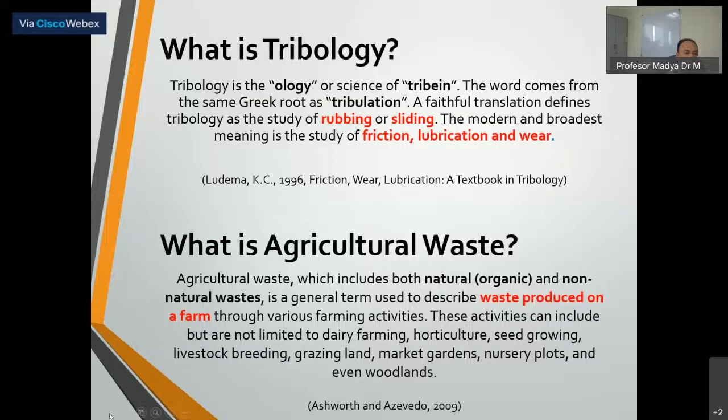Okay, this is a popular diagram, the breakdown of passenger car energy consumption in the world. This diagram was published by Holmberg in 2012. He found that in a passenger car, if we fuel the car with 100%, about 30% of the energy is used for friction losses. These friction losses need to be minimized as much as possible through technology developments, either using new materials, new coatings, or new lubricants - now we call them nano lubricants.

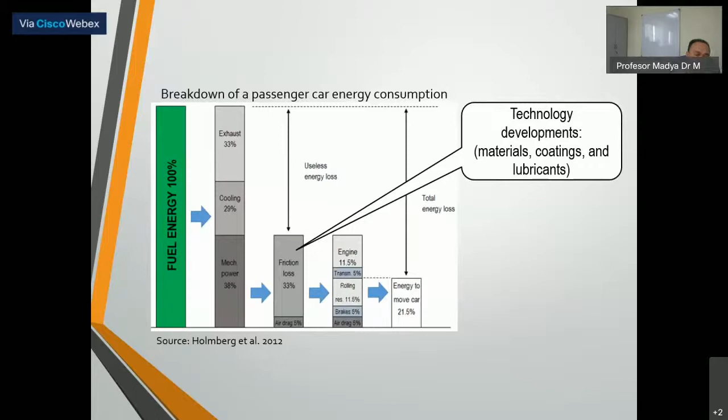Okay, and then this is a chart from the STLE, a list of technologies that will play a significant role in the transportation industry through long and short-term trends. It was published in 2017.

So from this, we can see the higher demand for the next 5 to 10 years. We can see that high efficiency vehicles are in higher demand, low emission vehicles are in higher demand, and lighter materials used in vehicle construction are also in higher demand for the next 10 years, along with longer lifespan for automobile parts. This relates to wear and also maintenance. So with this, we need to develop sustainable bio-tribo materials.

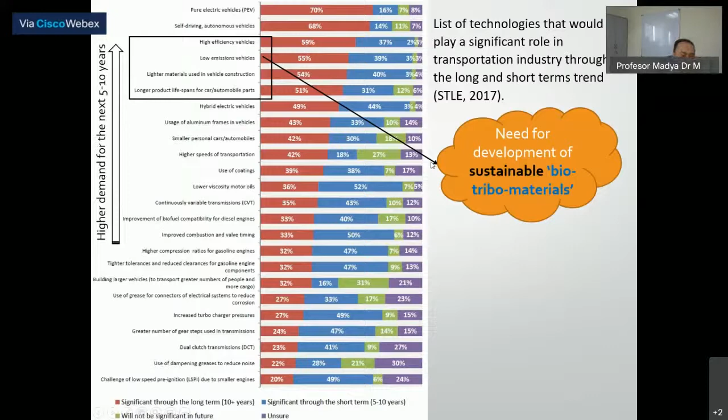Okay, actually, there are two commodity plants in Malaysia: oil palm and kenaf. The oil palm is managed by the Malaysian Palm Oil Board, founded in 2000, and kenaf is also founded in 2000, by the National Kenaf and Tobacco Board.

Okay, now we go to the palm oil industry in Malaysia. Palm oil is the largest source of residue, about 70% of the total in Malaysia. The Malaysian palm oil industry itself is committed to minimizing the release of harmful waste to the environment, and today the zero waste concept has become part and parcel of industrial practice.

Okay, this is the oil palm tree. Malaysia is the biggest producer, with 11% of world production and 27% of the export trade. This oil palm tree actually creates a major disposal problem. There is an abundance of raw material available from the palm tree, consisting of around 90% biomass waste and only 10% oil. The oil palm tree only produces 10% oil, and the rest, about 90%, is actually biomass or waste.

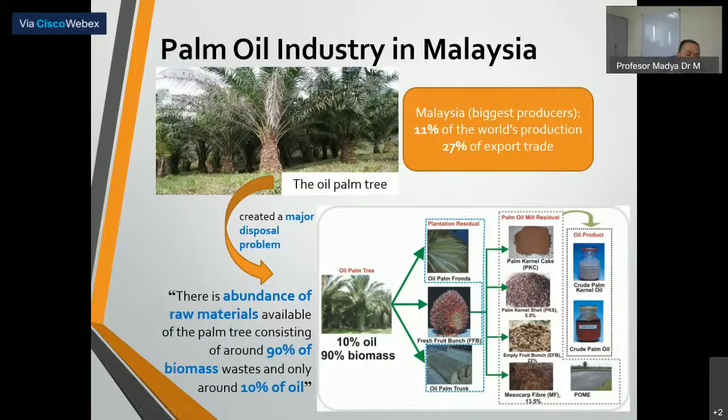Okay, this is the oil product and waste biomass obtained from palm fruits and seeds. That is about 52 million tons of oil palm. We produce palm oil, and then we produce palm kernel oil, about 20 million tons, but the rest, about 35 million tons, is actually waste, either in the form of empty fruit bunch, fruit fiber, or palm kernel cake.

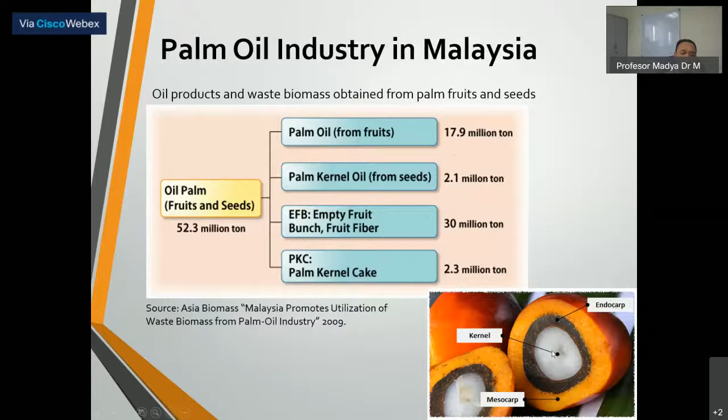This is the oil palm fruit - this is the endocarp, this is the kernel, and the mesocarp. This is the term. Okay, now we go to the kenaf industry in Malaysia.

Actually, this is the Kenaf tree. The developing of the Kenaf industry is reflected by two important events: the transformation of MNTB, Malaysia National Tobacco Board, to the Malaysian National Kenaf and Tobacco Board, and the inclusion of the Kenaf industry as one of the strategic industries under the East Coast Economic Region Development Program.

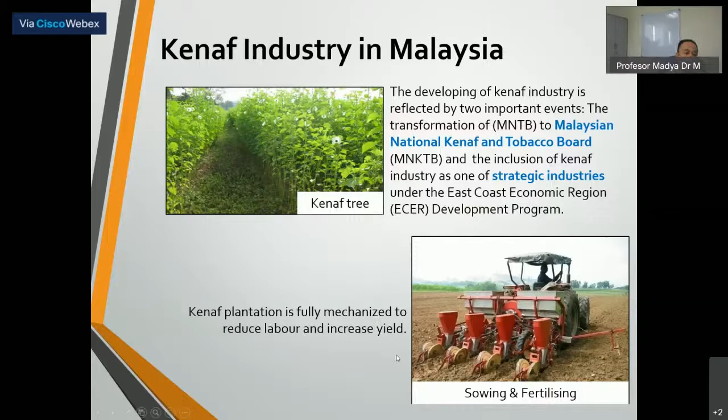This is now the Kenaf sowing and fertilizing using fully mechanized methods to reduce labor and also increase the yield.

Okay, the Malaysian government has taken the initiative to focus on the development of Kenaf products by integrating the upstream and downstream processing R&D towards economic and marketing activities.

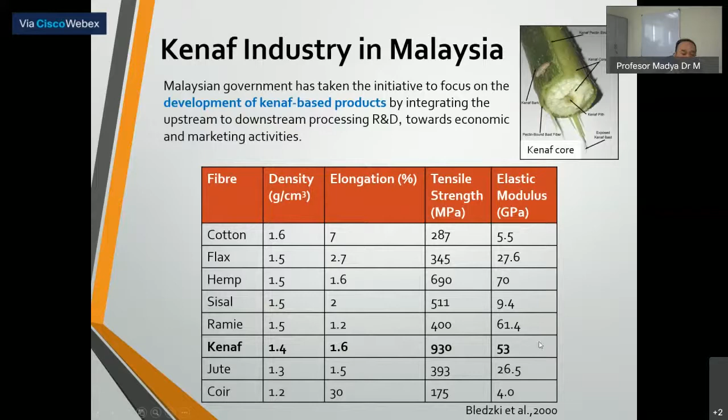This is the morphology, the term of the Kenaf core, and then this is the summary of the mechanical properties of the available fiber. We can see that Kenaf has a lower density compared to others, medium elongation, very high tensile strength above 930 megapascals, and also a very high elastic modulus of about 50 gigapascals.

Okay, now this is the future application of palm oil and Kenaf in tribology.

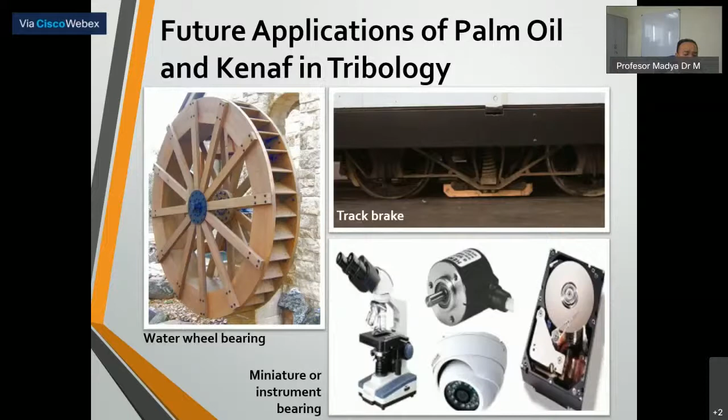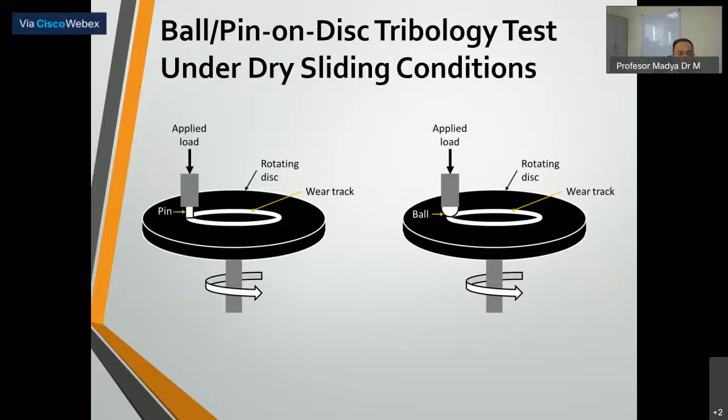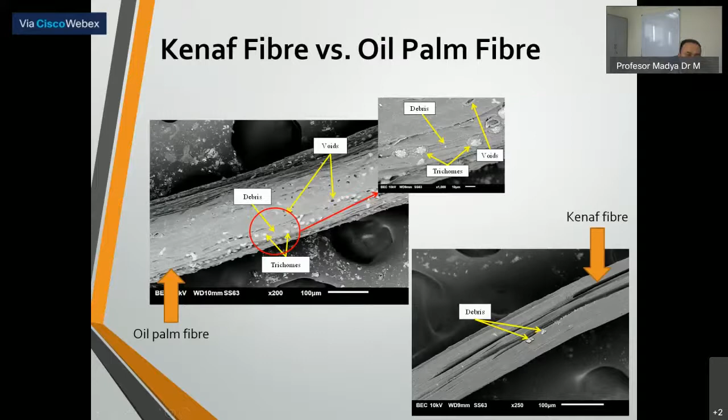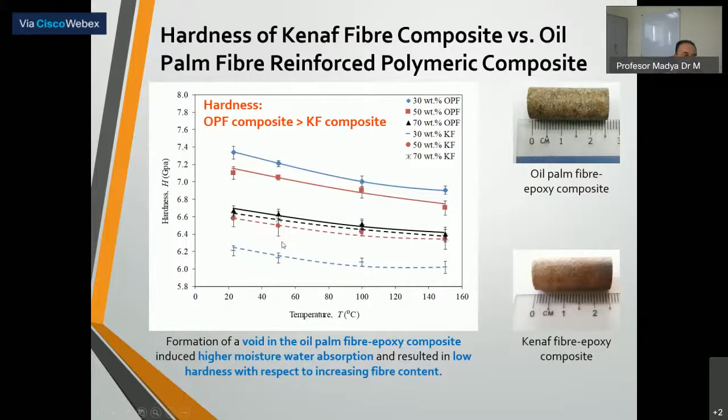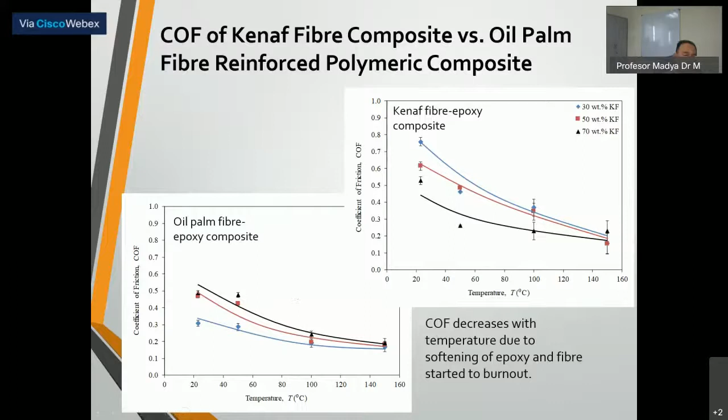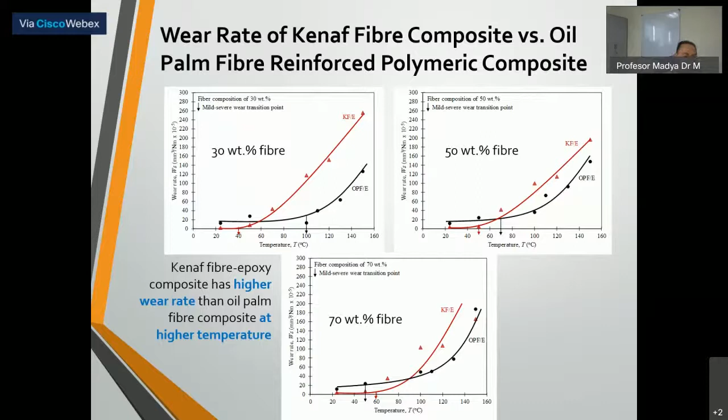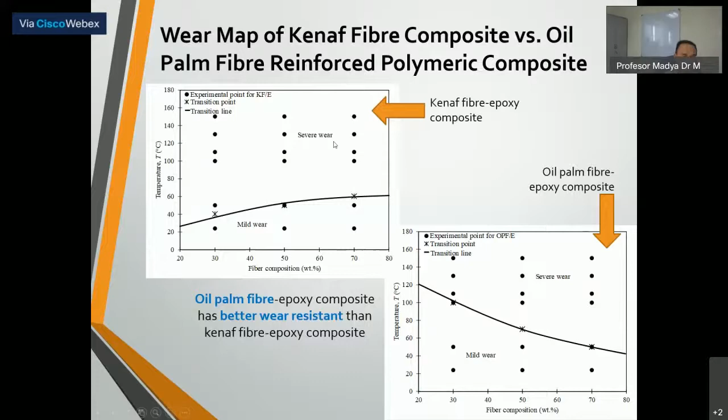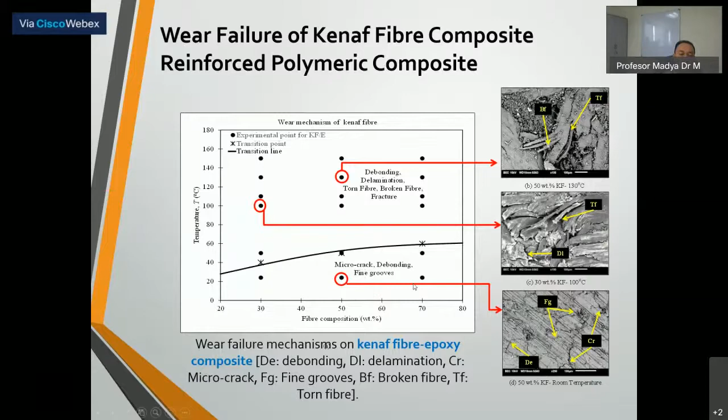In the mild wear region, we can see only micro crack and also fine groove, because of the gouging. This is the oil palm fiber reinforced composite wear failure. Basically, the wear mechanism or wear failure of both composites is similar.

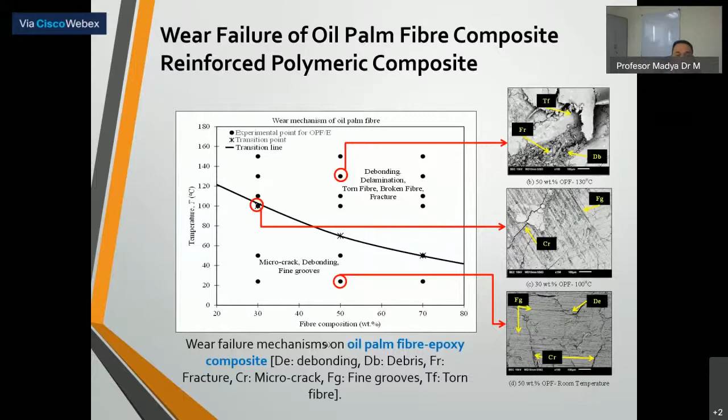Now we go to the palm kernel activated carbon. Actually, the palm kernel activated carbon is a form of amorphous graphite, and it has a disorganized form of graphite, which we call PKAC. This is the kernel, and we extract the kernel, then use a chemical process to make the activated carbon from it. The structure of the palm kernel is similar to graphite.

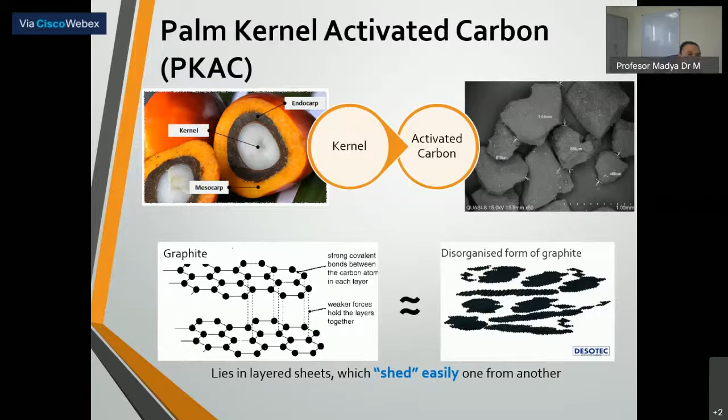This is the map for the palm kernel activated carbon. We can see that at higher temperature, the coefficient of friction and also the wear rate of the palm kernel activated carbon composite is also increased. And we can see that the hardness is also decreased with the temperature. This is most likely due to the softening of the epoxy itself at high temperature.

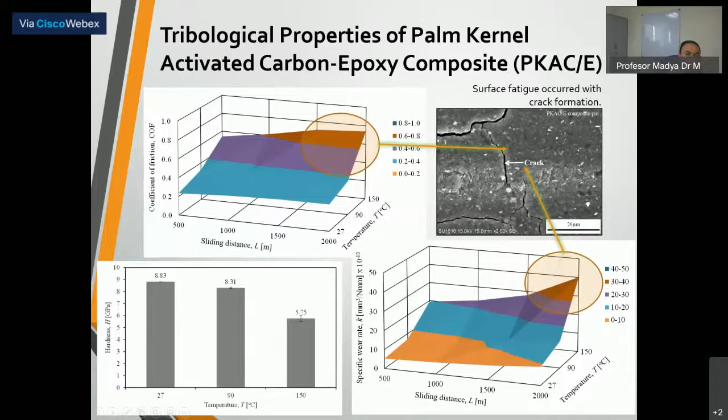Now at the high temperature, we can see there are some cracks at the composite surfaces.

This is where we compare our agriculture-based composite with other agriculture-based polymeric composites, and also commercial composites. You can see this is the palm kernel, this is the kenaf fiber composite, and this is the oil palm fiber composite. We can see that for the palm kernel activated carbon, the friction coefficient I emphasize is at room temperature, because at high temperature the coefficient of friction and also the wear rate is increased. So at room temperature, we can see that the friction coefficient of the palm kernel activated carbon is similar to this graphite.

About 0.2 or 0.3, because we test under dry condition. When we test under lubricated condition or water condition, the coefficient of friction can be as low as 0.1.

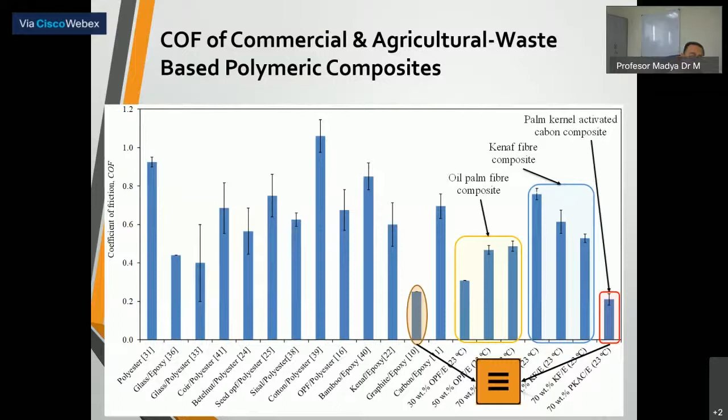Okay, this is the wear rate. We can see that the wear rate of palm kernel activated carbon is the lowest among other agricultural waste-based polymer composites, and also the commercial composites. We can see again the wear rate is also similar to the graphite.

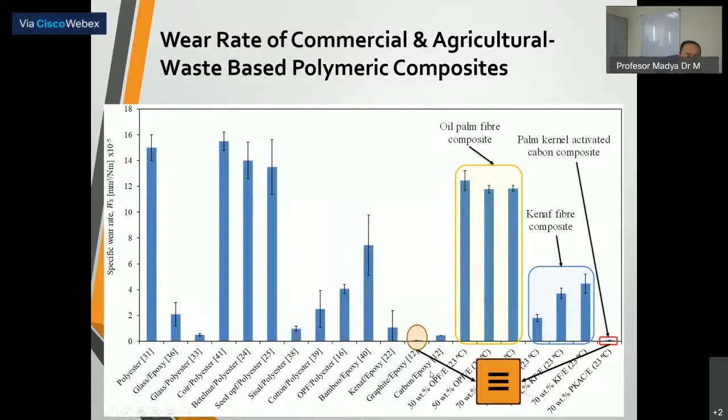This is the wear map for the palm kernel activated carbon composite. We can see that increasing the value of the contact pressure, this wear map as a function of contact pressure between the sliding speed and the contact pressure, by increasing the value of contact pressure leads to severe wear.

At higher level of sliding speed, the transition from mild to severe wear occurs at lower contact pressure. However, after 400 RPM, a considerably slow change of mild to severe wear occurs, where the composite material shows better wear performance. Actually, the wear map is beneficial for the material engineer or design engineer to fabricate and produce the product without prior failure.

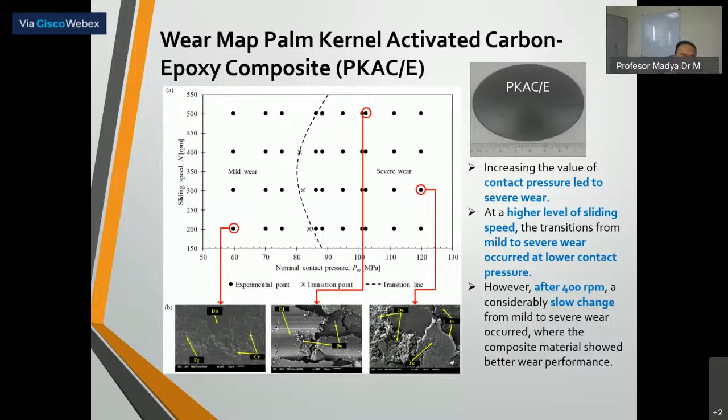Now we go to lubricant impregnated. This one is actually the palm kernel activated carbon without impregnation, and then we test that composite by impregnating this composite into the lubricant. And then we want to know about the finding, the results.

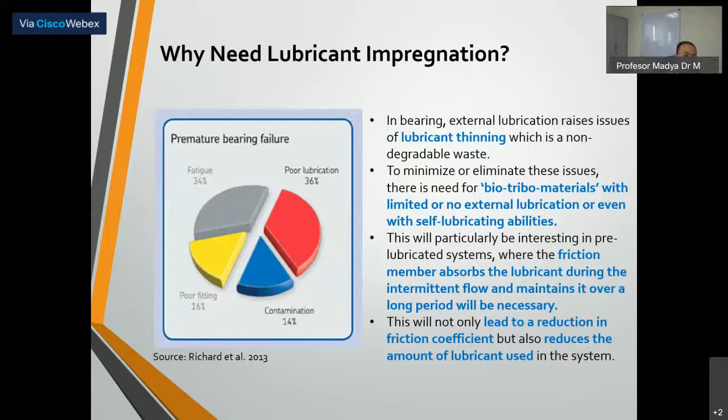This means we impregnate the lubricant into the voids in the composite itself. This will be particularly interesting in pre-lubricated systems where the friction member absorbs the lubricant during intermittent flow and maintains it over a long period. This will not only lead to a reduction in friction coefficient, but also reduce the amount of lubricant used in the system.

Okay, this is the result. We can see this is the composite without impregnation, and we use three types of lubricant: water, paraffin oil, and palm oil. For water impregnation, we can see there is a sudden increase of friction coefficient when we arrive around 200 meters. But for palm oil and paraffin oil, the coefficient of friction is quite similar.

What we can see here is that the unsoaked or non-impregnated composite has a higher coefficient of friction than the impregnated composite. This is where we soak the composite for 1 day. After soaking for 1 day, we take out the sample, dry it, and then test.

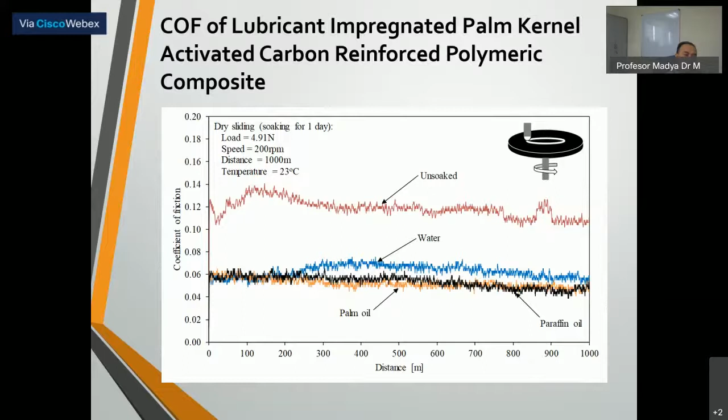This is the coefficient of friction for the water-impregnated sample. This is the first test: we soak for 1 day, dry, and test. After test 1, we dry again with an additional 1 day without any further impregnation, and then test. For test 3, we dry again for an additional 8 days, and then test again. So this is the result.

We can see this is the unsoaked as a datum. This is the first test, under water lubrication. This is test 1, and this is test 2. We can see there is not much difference in the coefficient of friction. But after the third test, which means after 8 days without further impregnation, we can see the coefficient of friction has increased.

This might be due to the evaporation of the water into the air. It means the sample does not have enough lubricant because of the water evaporation.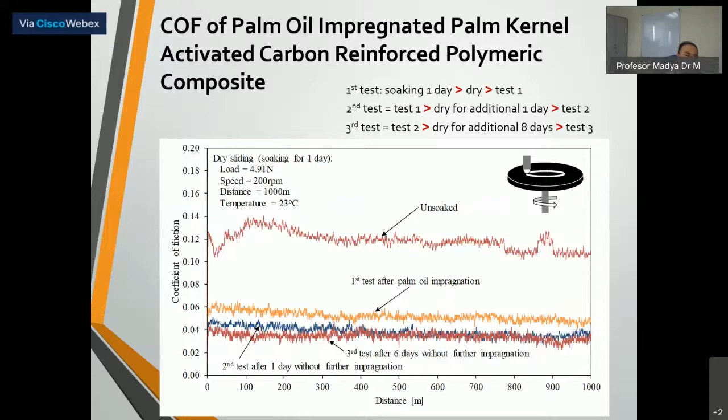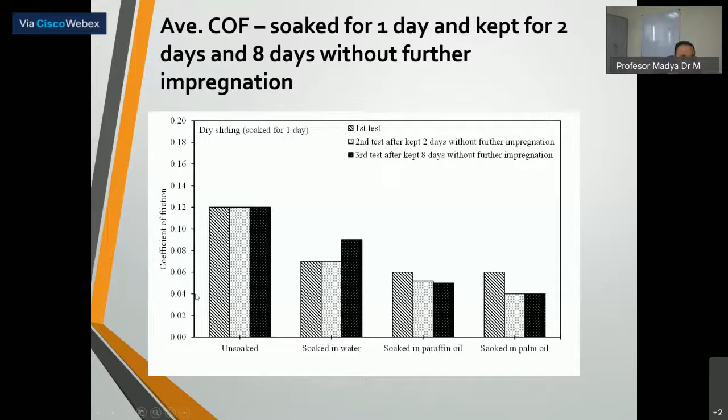This is actually the average, summarizing the coefficient of friction for these three graphs. We can see that for the unsoaked sample, the coefficient of friction is about 0.12. When soaked in water, it increased after being kept without further impregnation, to about 0.08. For paraffin oil, the trend is decreasing, down to about 0.04. And for palm oil, 0.06, we see the trend suddenly decrease, and we can achieve a coefficient of friction of about 0.04.

Okay, this is the wear rate. We can see that the wear rate increased after we soak with lubricant, because of the hardness. When we soak with lubricant, the hardness will decrease.

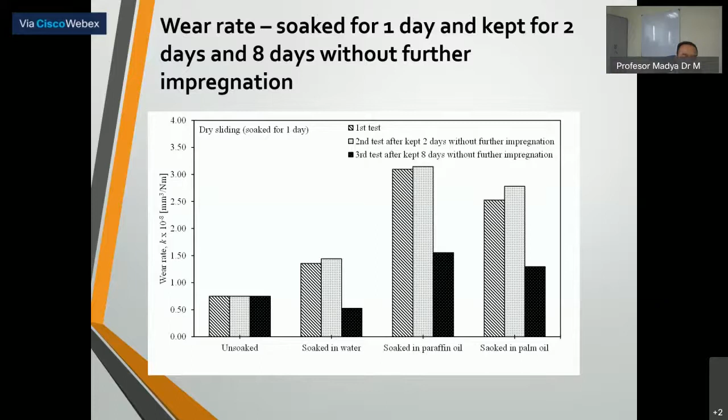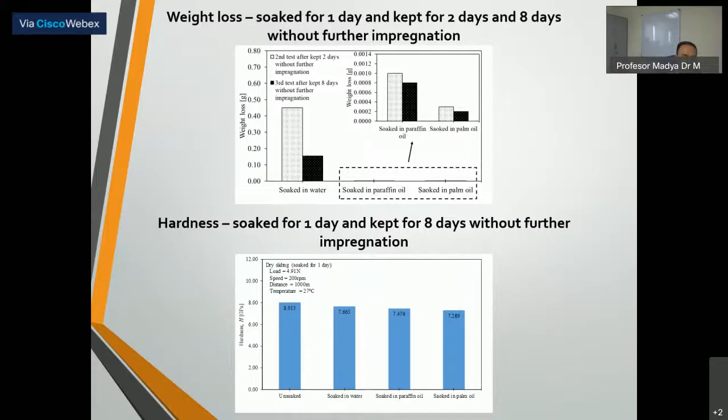Okay, this is the weight loss. Soak for 1 day and kept 2 days and 8 days without further impregnation. We can see that the weight loss when we soak in palm oil, there is not much difference in weight loss, which means that the lubricant is still in the pore or void of the material. And we can see that even with soaking, the hardness is slightly reduced.

Okay, now we see the oil palm fiber based graphene coating. This is actually our latest research, our latest finding. We use the oil palm fiber as the carbon feedstock for the graphene coating. This is the graphene coating on the copper substrate, and we use the CVD method. CVD means chemical vapor deposition method, and we successfully grew the graphene on the copper substrate.

This is the graphene OPF coated graphene, and this is the uncoated, naked copper. When we compare our graphene with other studies that grow graphene using commercial feedstocks like hydrocarbons, we can see that our coefficient of friction is most likely lower than others, and also the wear rate.

Okay, this is the stress testing. We can see this is the substrate of the copper. There are lots of wear here, but then this is for the graphene.

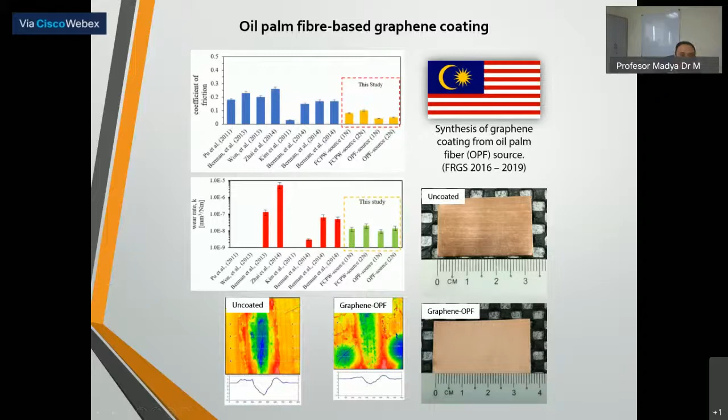As a conclusion, this map is from Friedrich et al. 2018. The map is an expansion of the specific wear rate and also the coefficient of friction. We can see that this is all under dry sliding. This is the application, and all the application is for bearings. For bearing applications, the coefficient of friction must be less than 0.4, and the specific wear rate must be less than 10 to the power of negative 4. If the wear rate is larger than this value, and the coefficient is larger than 0.4, the suitable application for this material is for brakes.

So the oil palm fiber and kenaf fiber reinforced polymer composite, the future application is for the brake. But for the palm kernel shell carbon reinforced polymer composite, the application is more suitable for bearings.

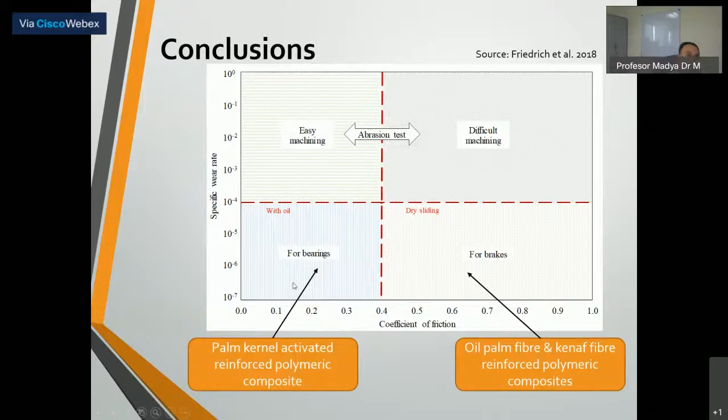Okay, thank you so much, Dr. Fadzli. That is indeed a very informative and very interesting research that you have. One thing, because you can turn waste into wealth. This is one of the national agendas, having a project which can turn the waste in the country into wealth. Alhamdulillah, that is really, really very good. And then I'm also keen on the last part of the presentation on self-lubricating, as we also in UITM are looking at metal oil impregnated, but you are looking at a composite, and that is very exciting. I think you can go further with that experiment.